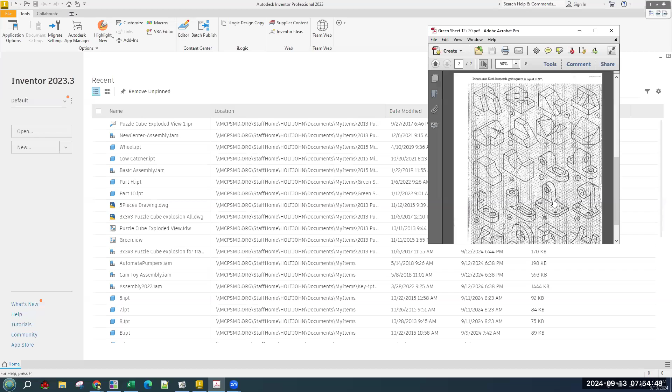It shouldn't be too bad. These don't go in order of difficulty. The hardest one, actually by a margin, is number 7, which doesn't necessarily make sense, but it is. But overall, there are more difficult ones at the end. It's just not the case for all of them.

Okay, so obviously we'll start with number 1. Let's do a new part file, hiding behind my whatever it's called. And let's see what we've got for number 1. Let's make it a little bigger in this size window.

So for this one, we are going to do additive. We are only going to be extruding and creating material. Of course, it could go either way. You could do our normal strategy of making a full block that's the maximum size in every dimension, and then cutting away what we don't want.

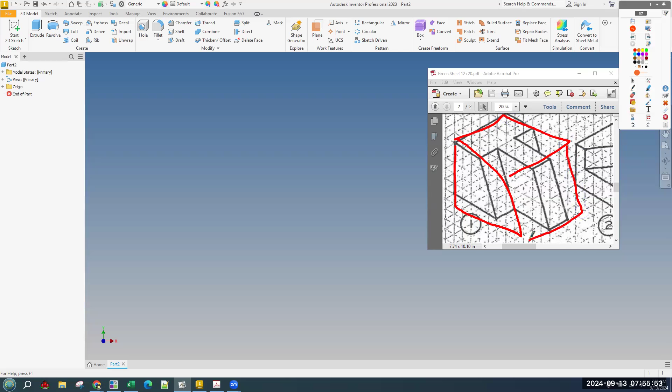But we're going to do this in 3 separate steps. I'll show you the shortcut for doing it in 2 steps, but we'll do it in 3 steps because it will be a little bit easier to understand.

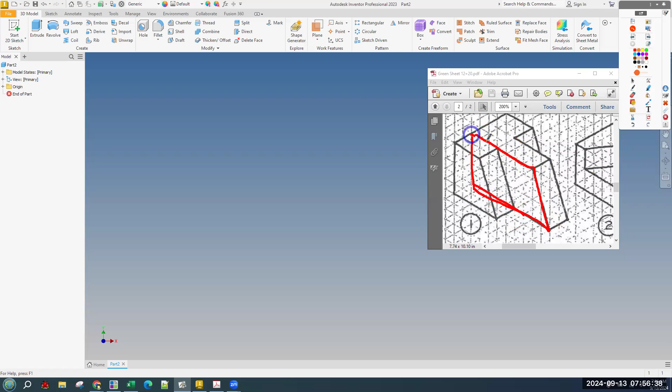The first part we're going to make is sort of this middle part, which is 2 inches wide, and we can presume it's the entire width back there. So we're going to make a sketch that is this shape, which does take a little bit of inferring how long this part is. But we're going to make this shape right here and extrude it too.

And then we will, on the front of that, make this shape, which will be back here, extrude that out too, and do the same thing on the back. I'll show you both of the shortcuts to make it easier, and then I'll do it the thorough step-by-step way. So the ways to make it easier are just a way to do the second part faster.

So we're going to make this sort of middle slice part first. Then this part here, we can extrude it, but we can extrude both directions. But it would need to be asymmetric, because if we're sketching on this face, we're going to need to extrude 2 this way and 4 this way. So we can do a 2-direction extrusion.

The other thing is project geometry, which means if you have another sketch or another face that you want to duplicate, you can project it. I'll show you both of those.

Okay, so the first part, we need a shape that's going to be roughly like this. And these dimensions, okay, across the top, it's 3 and 4. So this is 7 when we get to it.

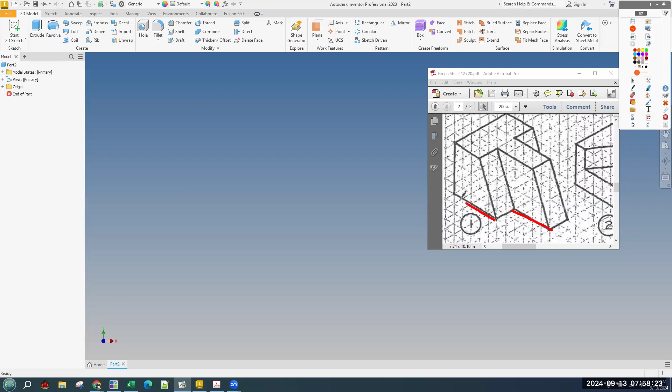And we don't need to know the length of the slope line because it doesn't matter so long as you know where the line begins and ends, so we won't need a dimension for this one. The left side here is 1, 2, 3, 4, 5 this way. And across the bottom is 1, 2, 3, 4, 5, 6, 7, 8, 9 — 9 total this way. So 9 and 7 are the bottom and top, and then 5 up the side, and then connect the slope.

So new sketch on our new part on the XY plane since we're drawing the front. And it's going to be another line tool situation where the line tool is: make the line, dimension, make another line, dimension, make another line, dimension.

So we're going to do the first click just at the origin, just to have something to anchor to, and we'll make the first line. You can do right click, okay, or right click escape, or hit the escape key. But you can also just click on dimension and it will switch it to the dimension tool, even without getting rid of it. And the bottom we said is 9.

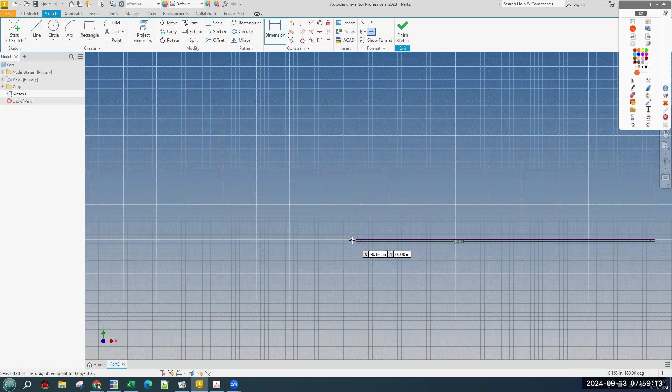And then we have a line tool. Let's snap it to vertical — make sure you can see how when you get close, it does like a little click. Okay, we do want to snap. That will lock it in vertically. And then let's dimension this height to 5.

Okay, then we have another line that goes straight across the top. Snap here to here, and we'll dimension that. That was 7.

Let me move this out of the way so you can see. And then the last part is this line that connects. Even without dimensioning this line, it will be fully constrained because the points that connect are constrained.

Okay, so let's do a finished sketch and extrude. This is the middle part, so we only need to extrude 2.

Okay, so we have this one. We need to draw this shape on this face. Really, we only need to draw the slope line because when we sketch on here, we'll get these lines for free with our auto project edges for sketch creation and edit, the setting that I changed. So we get those for free. We just need to draw the slope line and extrude this forward 2.

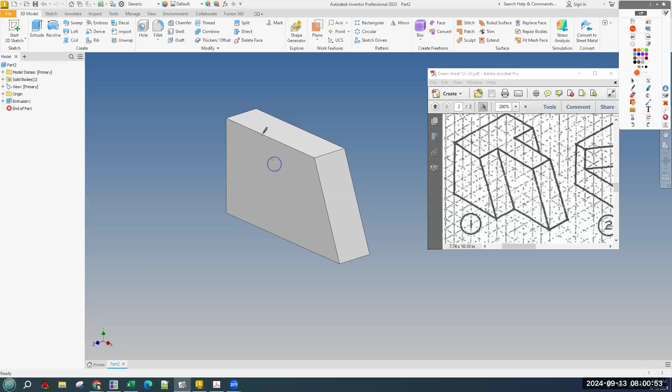So this line, the only line we're worried about is right here. This line needs to be 3 from the left at the top and 5 from the left at the bottom, making sure that when you make the line, you don't snap it to one of the green snaps, but you do snap it to the edge.

So we'll get a line tool, and anywhere on the top edge that isn't a corner or the exact middle point is fine. But again, it has to be on the top edge. If you miss, it won't work. First click, and then same rules for the bottom.

It doesn't have to be exactly here, this is roughly where it's going to be, but anywhere that snaps to the bottom edge that isn't a hard snap is fine, as long as it's not snapped to vertical.

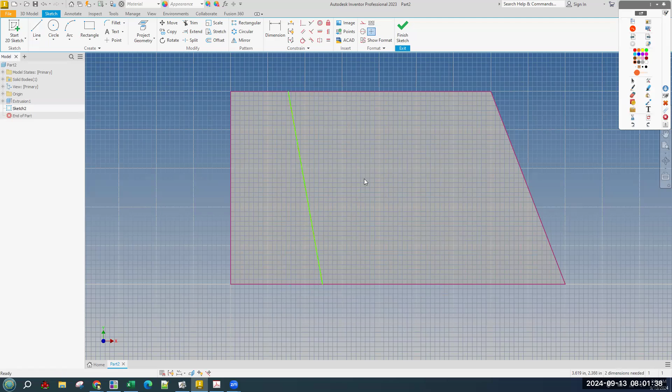And let's dimension. We need to dimension the distance from the end point of this line to the corner, and that works. That's 3. But when you're dimensioning this end point, you can also click on this side. Sometimes you don't get the place to click that you want, so you can just click on the side and it's the same thing.

Okay, and this needs to be 3 from the side. And this other one, first click, second click, and 5 from the side.

Okay, we will finish sketch and... okay, the regular way would be extrude, choose this, and extrude it 2, because that's how far it comes out.

Okay, the first shortcut is doing both extrusions at the same time, which we need not symmetric, we need asymmetric, and we want 2 inches coming to the front, and in order to make it go as far as we need, 4 to the back, because you can see where we're sketching, if we made it 2 in either direction, or symmetrical, the other one wouldn't go through our first part.

So this is the first shortcut. Okay, if you do that, you're done. It's that easy. Okay, the second shortcut, which I don't know why I'm continuing, but it's fine. The second shortcut, what's up?

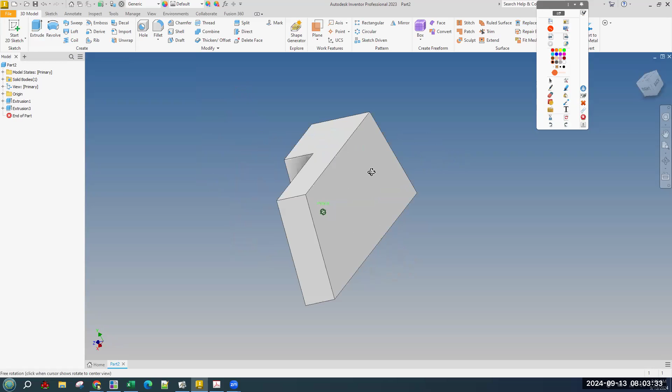Okay, the other shortcut is we'll just do the regular extrusion 2. And when we go to the other side, we are making exactly the same line. This line on this side in the back is going to be something like, it's going to be like that. And we could do it the long way of making a sketch and dimensioning it.

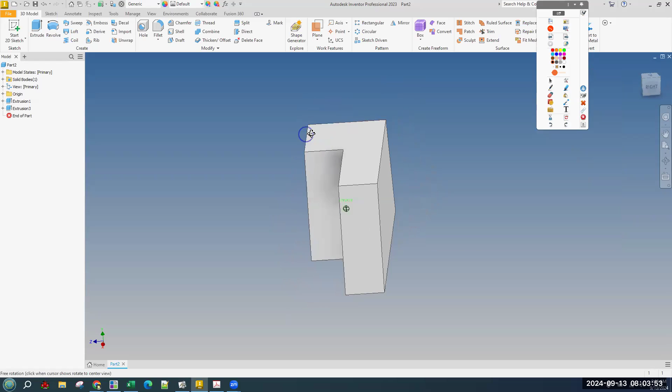But because it's actually the same shape as this, we can use what's called project geometry. So we're going to start a sketch over here like we were drawing it. And this tool up here, project geometry.

Okay, look, I have no lines on this. If I go to the other side, click project geometry and project this face, when I go back, it will be there, right? It just pops over whatever's there. This is a relatively basic use for it, but when we get to more complex things, it's essentially necessary.

But if you did that, you could then finish sketch and do the extrusion, and extrude it 2. Okay, it made the sketch for us.

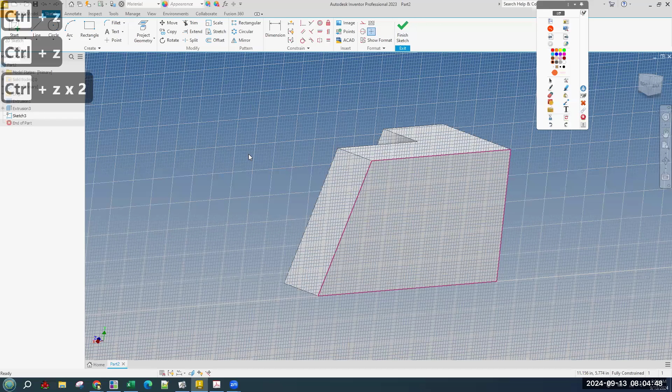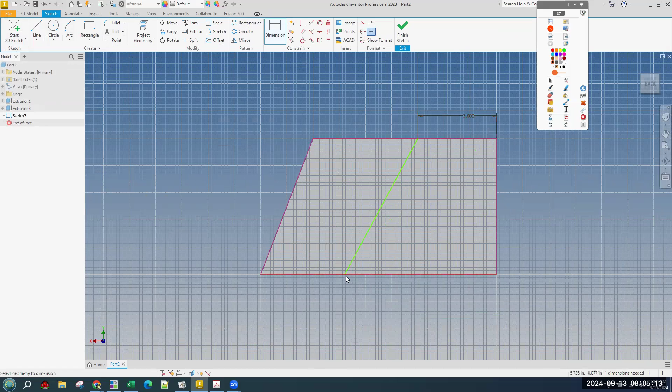The slow way, the thorough way, once you have your first extrusion, is just to do the exact same thing. Put a sketch on the back, get a line tool, these things stay up too long, I don't know how to change that. Get the line tool, same thing, snaps to the top edge, snaps somewhere to the bottom edge, dimension, distance from this endpoint to here is 3, and the distance from this point to the corner is 5.

Same thing as before: finish sketch, then press E for extrude. You can just type E on your keyboard, you don't have to do shift or anything. And there you go, that is part 1 from the back. Go ahead and save it with consistent naming practices: part space 1, or part 1 with no space.

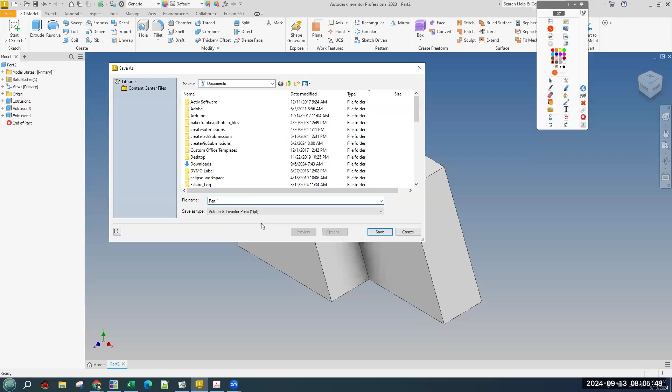Just do the same thing so they line up alphabetically. Okay, let's do number 2. We're going to do additive also, making this base part that is two tall. 1, 2, 3, 4, 5, 6... I think 8 wide is my guess, but the photocopy is so blurred out. Let's see here: 2, 3, 4, 5, 6, 7... yeah, 8 wide.

So we're going to make this bottom part that's two tall and 8 wide: a rectangle, two tall, 8 wide, then extrude it 8, and that'll make the base. Let's go ahead and do a new default part file. Start a sketch, sketch on the front, get a rectangle, snap to the origin, first click, out here somewhere, second click, dimension the height to 2 and the width to 8.

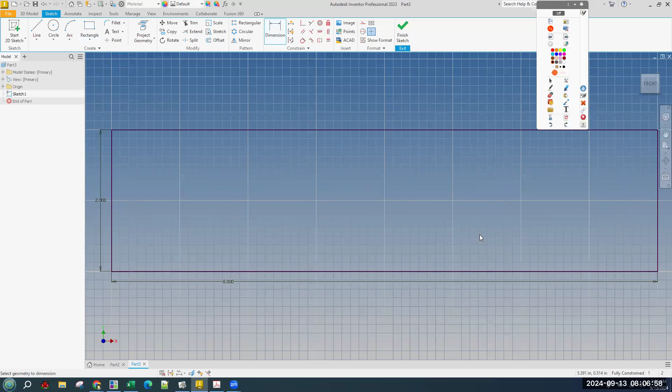Home to zoom out, or really just finish sketch should... well, no, it doesn't. Finish sketch will be like that. And extrude, and we want to extrude it 8.

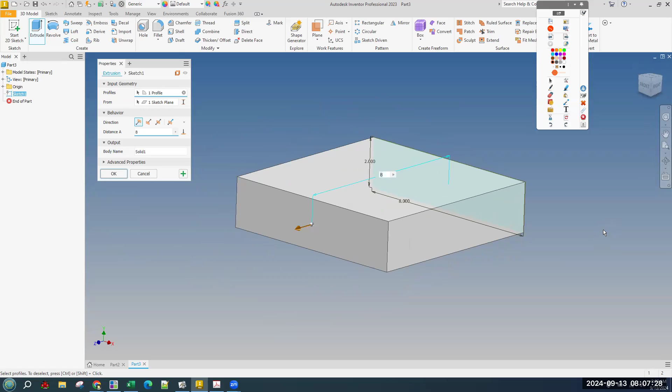It is important, especially when you're doing cuts or second extrusions, the first extrusion is always going to be roughly like this, but it's important to look at your work from a 3D angle. It doesn't necessarily have to be an exact corner, but you should be able to see which direction it's extruding, especially if you're doing some sort of cut. And when you're doing sketches, which are 2-dimensional things, you should be looking at it straight on from a face, because you're working in 2 dimensions when you're doing lines and rectangles.

Okay, so we have our sort of base situation that is like that. And now we just need to do these two top things, which look like that.

Please put the food away, if that's what that is.

And we can do it in the same part feature. We'll make this triangle over here and this trapezoid over here, and in the same move extrude them both up a distance of 2. So what are the dimensions of these shapes? Well, this one in the bottom right is pretty easy.

This length, or rather, all we have to draw is a single sloped line, which will be this one. We will get these two lines for free when we make the sketch. We just need to know where this point is and where this point is. Okay, this point and this point.

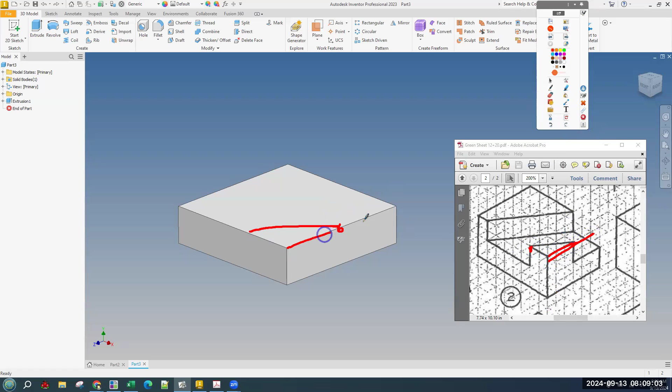We know that it is 1, 2, 3 this way, but since the entire thing is 6, when we click to start the line, we can actually use that center point, or not the center point of the edge, that green dot, as our first click, and we won't need to dimension it. The center dots and the corners are very useful if you mean to use them. If you don't mean to use them, it will keep you from changing the sizes of things, which is not good.

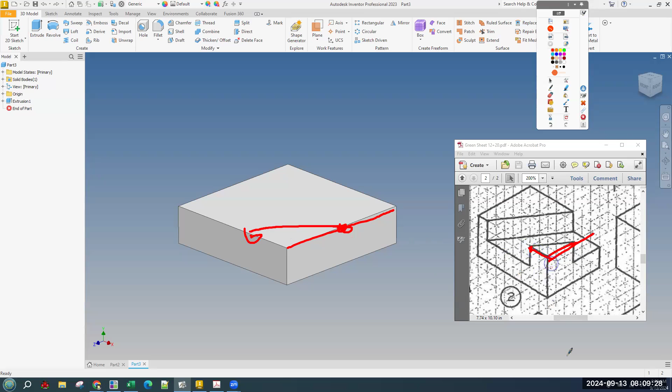And this other side is just 2 from this corner, and that'll be our first triangle. Let's take care of that. We're not going to click finish sketch when we're done with it because the other part is going to go in our sketch. Hold on, did I extrude this right?

I don't think I extruded this right. Hold on, did I extrude it 8? It looks square, let's see here. Edit feature... yeah, I did extrude it 8: 6 front to back and 8 left to right. So it should be a rectangle like that way.

Okay, so we'll start a sketch on the top. We should be looking at the face called top, where you can read the word top. And when you can read the word top, the rectangle shape should be wider than it is tall.

That's how you know you're sketching on the correct side. We'll get the line tool, and we can use the center snap. If you get close to the center, it will click and turn green, and the little cursor middle part will turn green — that's our first click. Our second click is down here on the bottom edge somewhere, but in this case, not the center point, just anywhere on this bottom edge. Click, and let's get the dimension tool and dimension the distance from this endpoint to the corner.

And that distance was 2.

Can you please put the food away? Like indefinitely. Thank you.

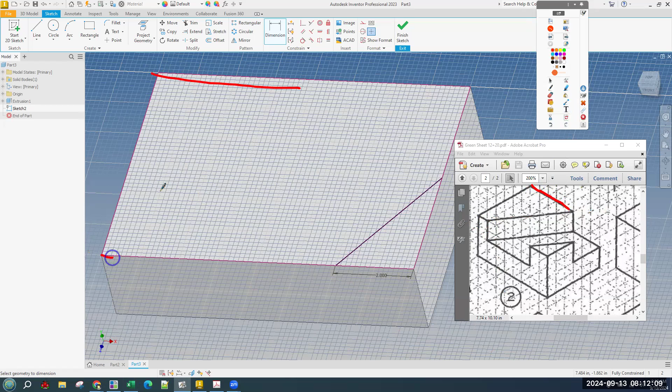So without having clicked finish sketch — if you did click finish sketch, you can always edit a sketch by right-clicking on it, and you can tell I right-click when it's the orange circle. Right-clicking and doing edit sketch will let you bring it back up.

And so our line snaps somewhere on the bottom edge — well, this is really the front of the shape, but somewhere on the edge here, not the corner. First click, and second click somewhere on this edge, which is the back, but not the center point.

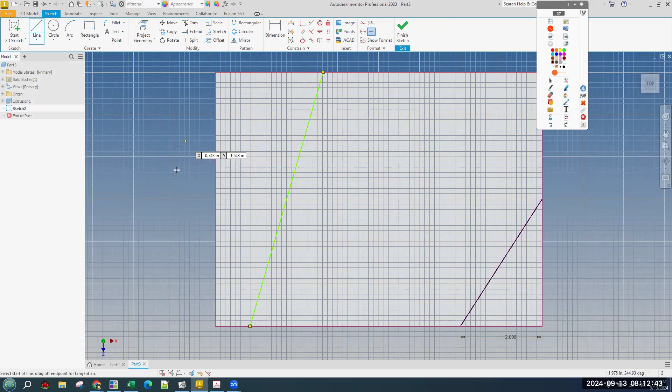And we need to dimension it. The distance from the corner here to this endpoint was 1 and is 1. And the other, from here to the corner, was and is 5.

Now we can finish sketch and extrude, choosing both of the areas that we want. And if you choose the wrong thing, or too much, or something like that, just hit cancel and go again.

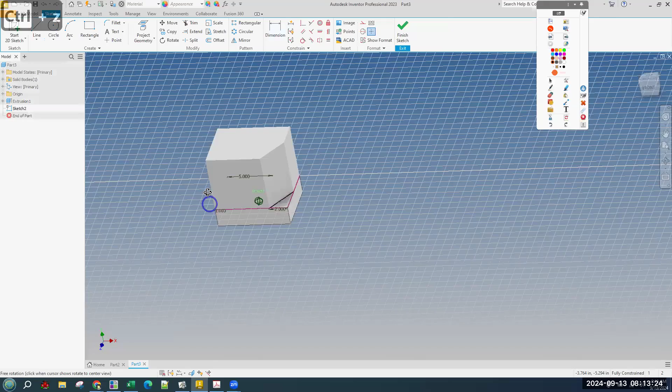Can I hit cancel? Please tell me this isn't jammed. This is bad. Let's finish sketch. Is it all broken? Because this doesn't exist.

Okay. There we go. All right. Yeah, that's not good. But we'll be able to be all right.

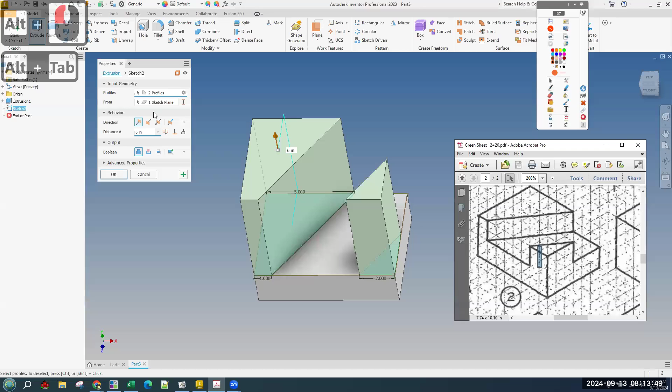So let's extrude, choose this, and we are only extruding it up 2 more than what we have. So we're just going in the regular direction 2. And there you go — that is part 2.

Okay, let's keep moving.

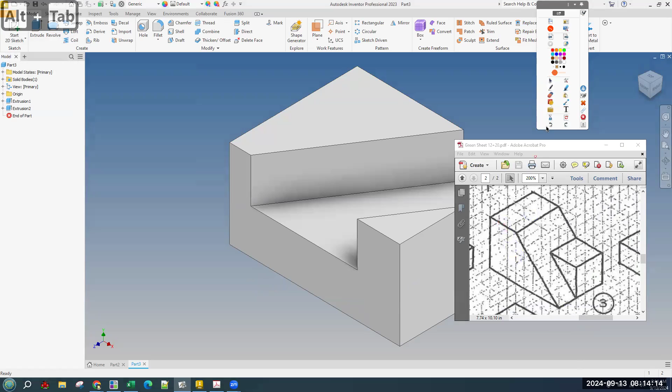Part 3, there are a few ways to do this. Like everything, there's a few ways to do this, but we are going to do this in 2 steps. First, let's make a new part file.

Our first step is going to be to make this wedge shape and extrude it all the way back. So we'll have this, and it'll go down like that. And then we're going to make this part over here, which is actually going to be easier to draw on the back and then extrude it forward.

But regardless, same thing as before, where we have a sloped face, which means as long as we know this point and this point, we're good. So from here, it is 1, 2, 3, 4, 5 tall, and 1, 2, 3, 4, 5, 6, 7, 8. So 5, 8, and 3, and extruded 5 also.

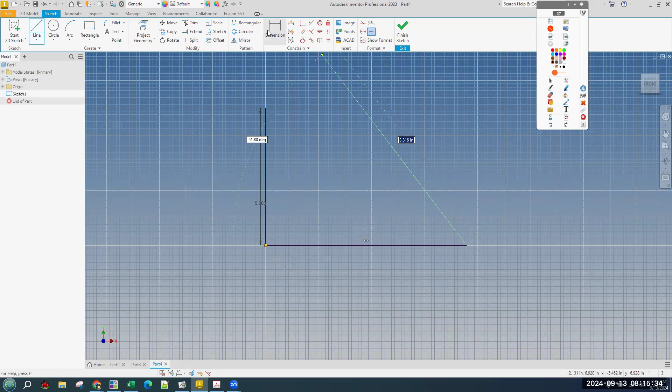So start a sketch on the front and use the line tool. First snap here, second snap there. Remember, lines are always line-dimension, line-dimension, line-dimension — 5 tall. Line tool: from the bottom, snap there, across, dimension that to 8.

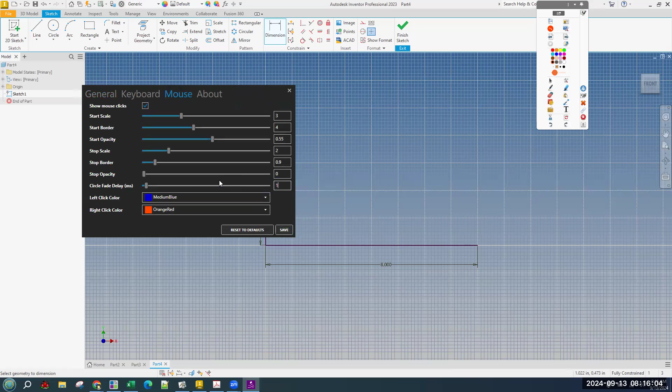I need to speed up some things. Hold on, let's go like this. How can I do that? Let's go mouse, and let's make that set of 0.3. Let's go 200. Maybe 150. Yeah, that's a lot better.

Okay, next line across the top.

Dimension — maybe that's a little too short, getting a little pedantic here. But either way, 3 across the top, and a line that goes from here to there, and it's already fully constrained. Right click OK, it'll say fully constrained, plus all the lines are black or dark blue or something.

We need to finish and extrude, and our extrusion distance was 5. And there is the first part feature, or the main part feature. The other part feature is a sort of block.

That is what we already have plus 3 by 3, up 3 and over 3, and it comes forward 3. So the sketch we're going to make is just this shape, but we're going to make it on the back.

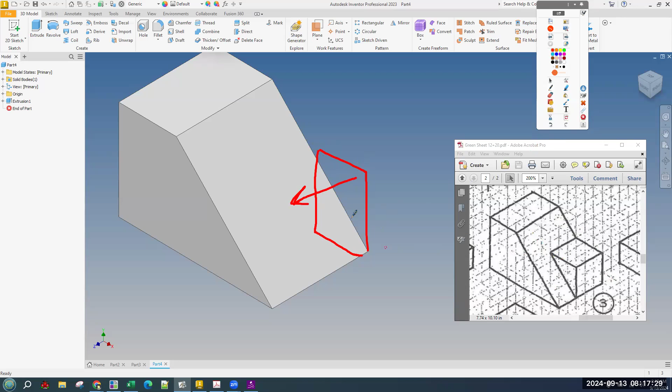Because we want it to be a closed loop and everything, it's actually easier to make a full square that's 3 by 3 and then extrude it forward. The fact that some of it's going to extrude through twice doesn't change anything.

So we are going to look at the back. This face right here, you can see, is the back face. Let's go ahead and start a sketch on this.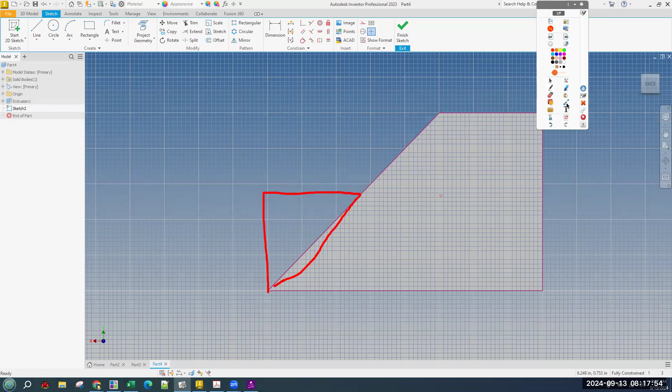Like I said, the shape we want to make is just 3 by 3 this way and extrude it. But you can do it in one step with a rectangle and snap it. It has to snap to this bottom point of the wedge, and then you can just make it up here.

If you snap it to here, it kind of limits it, especially if you click on the middle point of this side, which should be somewhere around here. Am I not getting it? Yeah, there it is. So just something like that is fine.

And dimension it to what we want, which is 3 this way and 3 this way. It just as easily could have been done with lines — in fact, I'll show you that also. Either way, so long as you... well, the line tool is pretty obvious. It would have been line, dimension, line, dimension, so long as the dimensions are right.

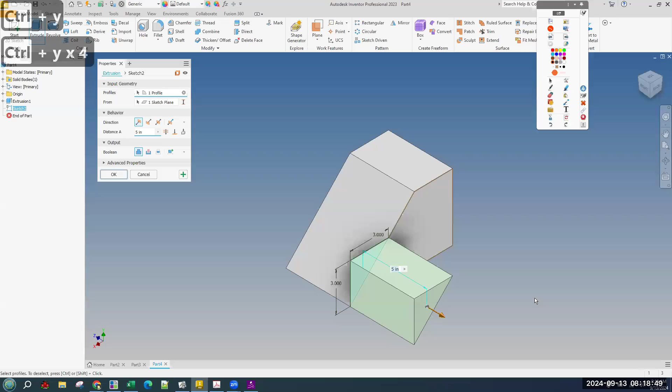And finish sketch, extrude, and it will actually let us just choose this one. But if it didn't — which sometimes it guesses wrong — if we chose both of these, regardless, we would need to switch direction, making sure it doesn't switch to cut. We need to leave it there. In fact, that alone is a reason to only select part so that you don't accidentally cut.

By which I mean, when you go to extrude, you really might as well only choose that one. And we'll switch direction and make it 3. And that's it. Now hit OK and save it.

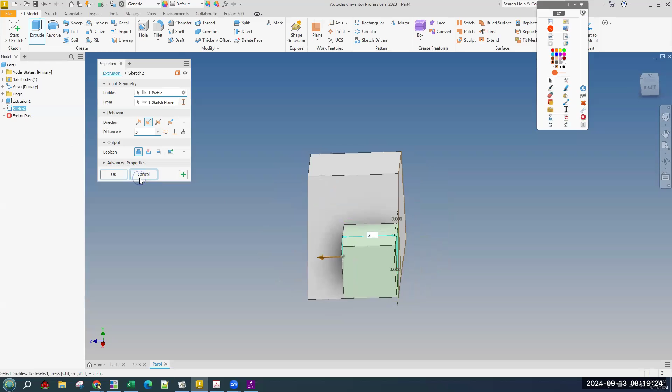If you did this, this is an important thing to note — this will save you some trouble. If you do switch direction, sometimes, and it did for me, it will automatically switch to cut, because it thinks you're extruding into something you probably want to remove or get rid of. If you switch direction, you can see it switched to cut, and that isn't what I want. If I accidentally hit OK and it wasn't this, the way that you solve it is by editing the feature.

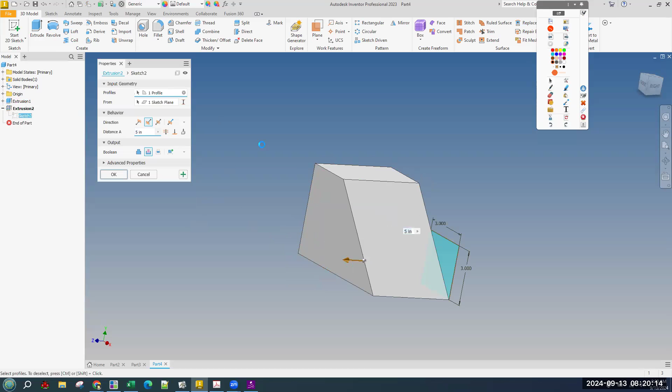The sketches, the two-dimensional things, are consumed by the feature. If you want to change the extrusion distance or what have you, all you have to do is right-click on the name of the feature. In this case it's extrusion 2, and do edit feature, and it will give you the chance to change things — which I don't want to cut, I want to create material, but I only want to create 3.

And there you go. That is part 4.

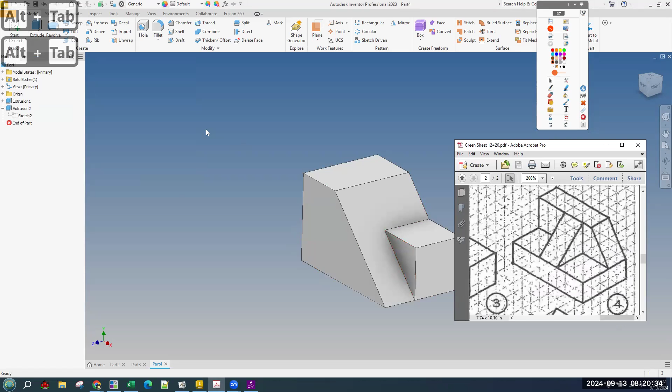Okay, and I think we can do 5 today. That way we'll get through the packet in 4 days instead of 5 days, which still sounds like a lot. Maybe we'll do 6 today. I don't know, let's see.

What's up? You need to switch direction. Okay, so for you it is going the other direction, like out. If you switch direction, first of all, you're extruding — look at it from a corner up here. Okay, yeah, you got it. You're next.

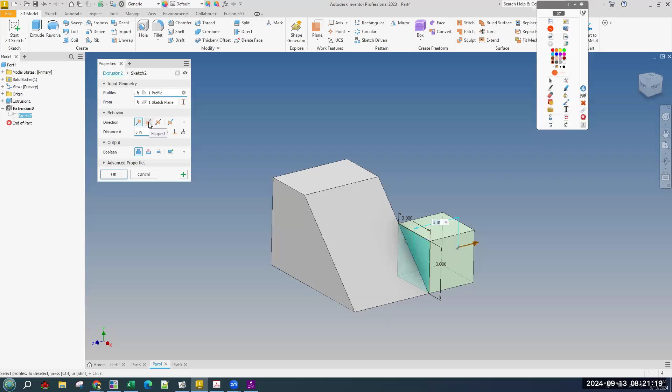Please be on. Good. If you choose the other direction, it will move towards the inside, but make sure it doesn't switch to cut, which, I mean, just be aware. So, yeah, there you go. And it's fine. Hit okay.

What do you got? It's probably not a closed loop. You probably missed a connection, is my guess. Or do you have 2 sketches open? Okay, then it's somewhere on the sketch, it's not connected all the way around.

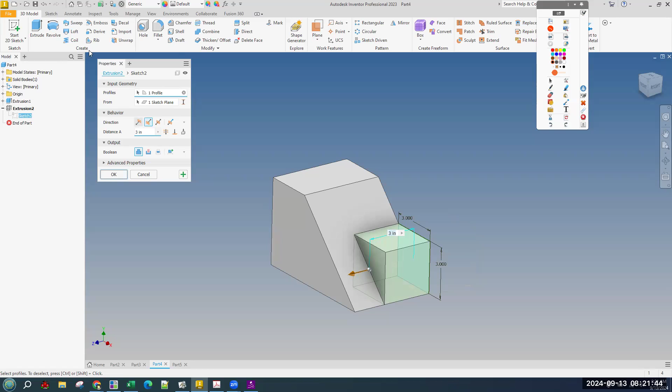Okay, so part 3 and part 4 look like this. We are actually going to do this in a few different part features, trying to make it as easy as possible. But this is going to be a subtractive one, where we start with our full block of marble and cut away everything that isn't our sculpture, which is a subtractive process.

So what is the size of our block of marble? 3, 2, and 3 is 8 wide. Height is 2 and 3. Tall is 5. And so rectangle 8 by 5, extruded 5.

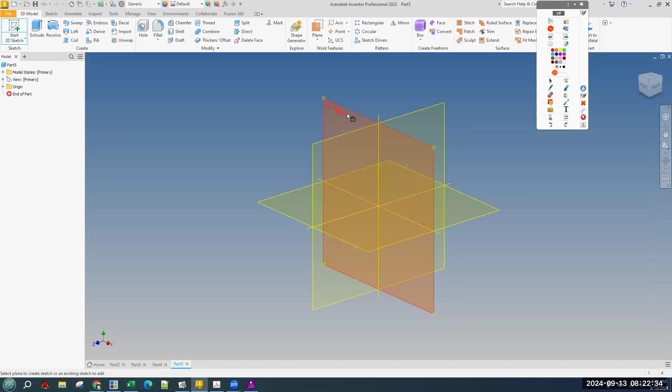So we'll start and we'll draw on the front. We'll get a rectangle. And did I get a rectangle? I did, and we'll start here. And what did I say? 5 tall and 8 wide. And finish sketch, home to zoom out, and extrude it 5.

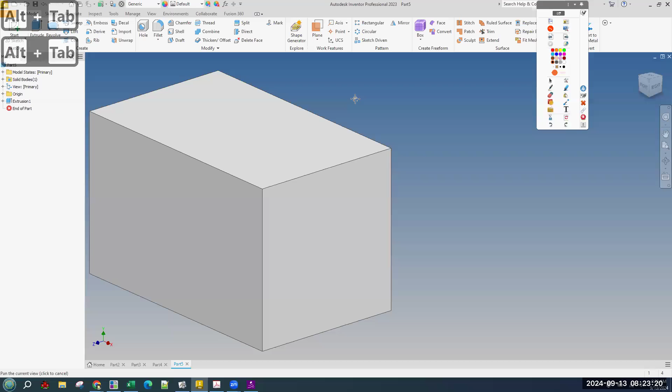Okay, and so now let's figure out what we need to cut. The way I see it is that there are these 2 sort of steps or platforms or things that are each 3 by 3 squares. We're going to do those first. And what we have is this big...

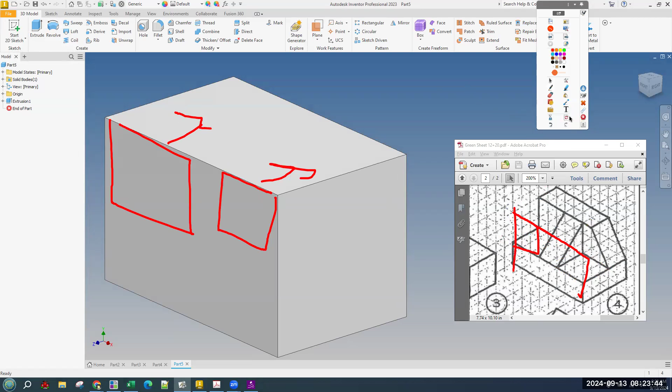We could either draw squares on the front that are 3 by 3 and cut extrude them 3, like 2 squares like that, and cut them back. Or we could do the same thing on the top, a couple of 3 by 3 squares here and cut extrude them down, which is the way we're going to do it to make these platforms. We're going to push those down or cut material. Like I said, they're just 3 by 3 squares, easy to remember, and cut extrude 3, so they're 3 by 3 cubes of space, which you can ignore that if you didn't get it.

Okay, so we need a new sketch on the top surface. I like to look at it from an angle where you can read the word, usually I should say. We need one rectangle that snaps to the bottom left corner, which is really the front top left corner. And another one, I'm just going to go ahead and draw a rough estimate for both of my rectangles first. You can see where we are sketching, we're sketching on the top.

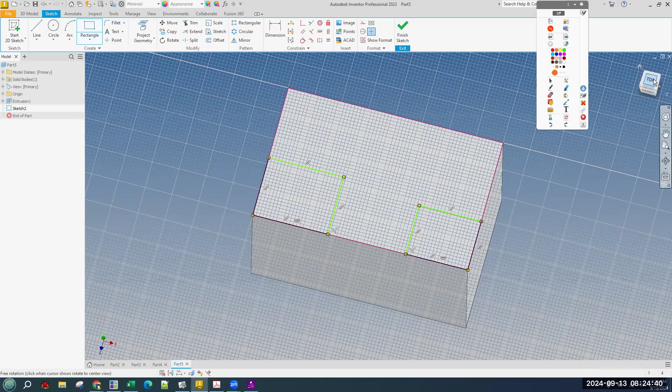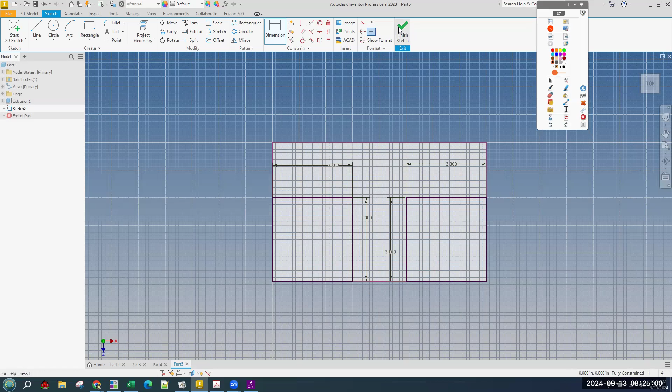And let's dimension, all four of these green lines are 3 - 3 wide, 3 tall. And again, 3 wide and 3 tall. Finish sketch and extrude. Extrude this, switch it to cut, but we only want to cut 3.

All right, and the way I see it, we definitely have at least 2 more features, but we're going to try something different. If you were working on this on your own, the way I usually show it is essentially the same tools we've been using before, where we're going to sketch in order to make this sloped face. We would sketch on this face, and in that sketch, just have a line that connects these 2 points and cut away everything that we don't want. And actually, that would be plenty fast, but I want to show you a different tool.

And the tool is called chamfer. There are 2 ways to sort of round over an edge. There's chamfer, which is like a cut or a knockdown type of thing, a sort of - they call it breaking the edge. And the other one is a fillet. You probably will say fillet, but it's not - it is a fillet, and that is a round over edge situation.

All of which you need to dimension them, you can't just take the hard pass. You can't just throw it up there, but we're going to use this opportunity to use the chamfer tool. And the first thing you have to select - any tool that pops up, well, that doesn't work. Any tool that pops up, I need to use a tool that will actually work.

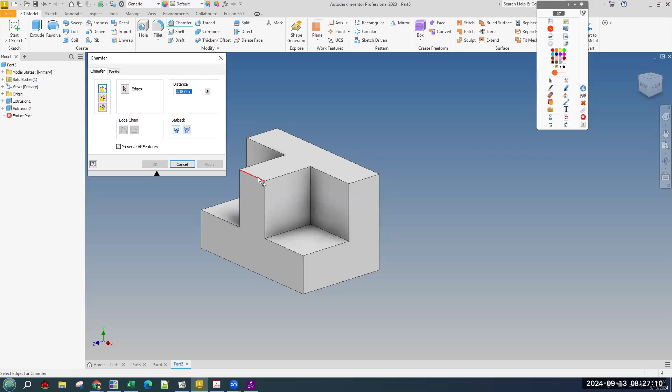The dimension here is the distance from that edge. So the distance that I just dragged it to is 2.1875, which is actually 2 3/16, is the distance from the edge that we selected.

Because it is this first type, it will make it the same distance in both directions, whatever dimension we put in, which means this will be 45 if we started with 90.

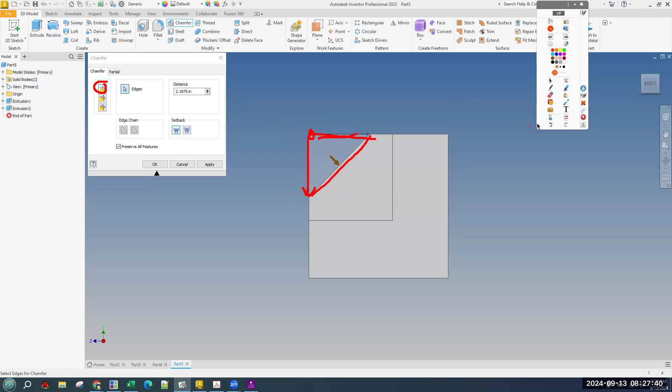If you mouse over, you can see this first type is probably called symmetrical or identical or something like that.

So the dimension here will be distance. That's the distance in. You can also choose by distance and angle, and you can choose by 2 different distances, which is what we're going to do for the other slope face.

But for this one, we're just going to start from scratch if you're trying to follow along. Chamfer tool, choose the edge that we want to cut or knock down.

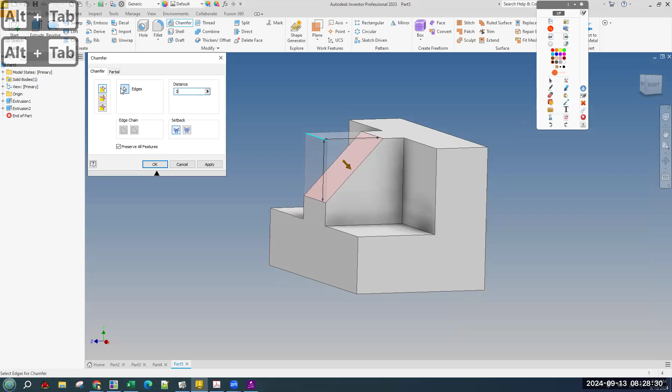The dimension is how far from the side, which if we have our rectangle here, it's 3 in from the corner that we have. So the distance is 3. And hit OK - that is one way to do that.

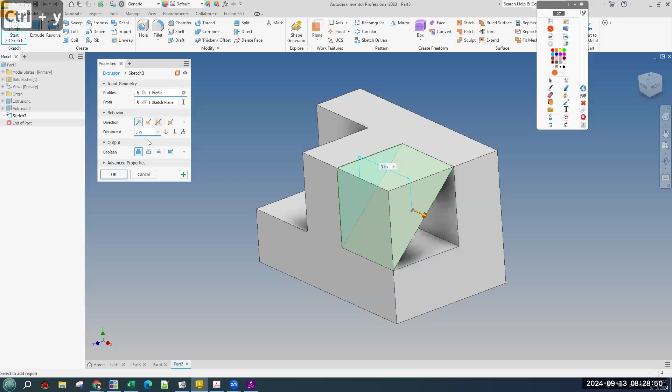Again, we could have just put a sketch here, get a line that connects here to here, finish sketch and extrude. That would have been faster and used abilities you already have. But showing you the chamfer tool, I think, is at least extending your abilities.

And we're actually going to use the chamfer tool for this other sloped face by using the 2 different distance option.

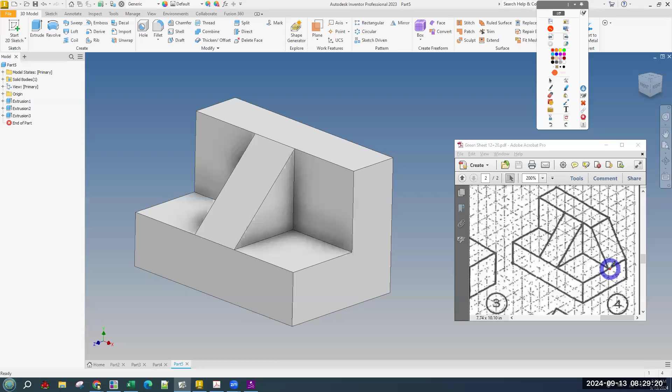Because right now, this block goes out here, which means it's like that. And this slope face starts here just like the other one, but it doesn't go to the corners.

It's not 3 in both directions - it's only 2 this way while being the full 3 that way. So we have to use the 2 distance type of chamfer.

So we'll use chamfer - first choose the edge, then switch to 2 distances as the type of chamfer. And we need to - do we need to reselect? Yeah, I guess you reselect the edge.

Distance 1 should be 3 and distance 2 should be 2. Depending on which way you're counting as positive, it might be 2 this way and 3 this way.

Or at least in the space, you may have distance 1 and distance 2 reversed, but either way it shouldn't look like this - it should look like this.

Okay, so that the slope is like that. And if you need to see that again - why is this... oh, because I made the other thing like that.

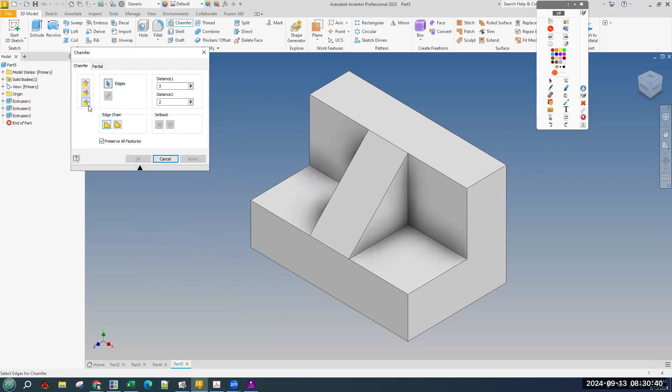So it's chamfer, choose - I guess technically you should choose the 2 distance option first because it made me reselect. Choose the edge and then figure out which is distance 1 and which is distance 2.

The one that goes this direction, which for me is distance 1 and probably will be distance 1 for you, needs to be 3.

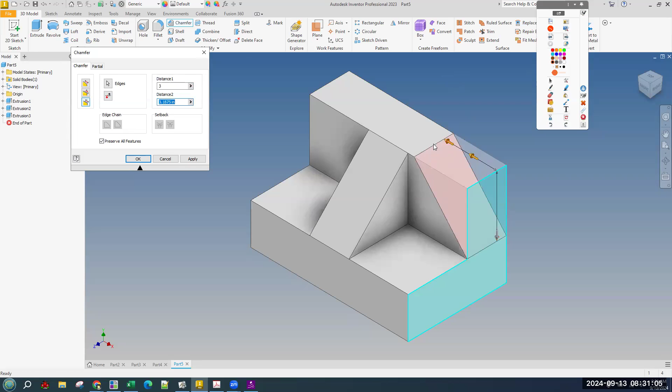And the one that goes this way, for me, is distance 2, and this needs to be a distance of 2 as well. Okay, and there you go - part 4.

Okay, and I do want to get up through all this stuff. Maybe 5 is enough to do today so that we can get the walkthrough up.

Okay, I think part 5, the 5th one of today since we started at 1, is probably the second most difficult on this, at least not knowing how to do it from the start.

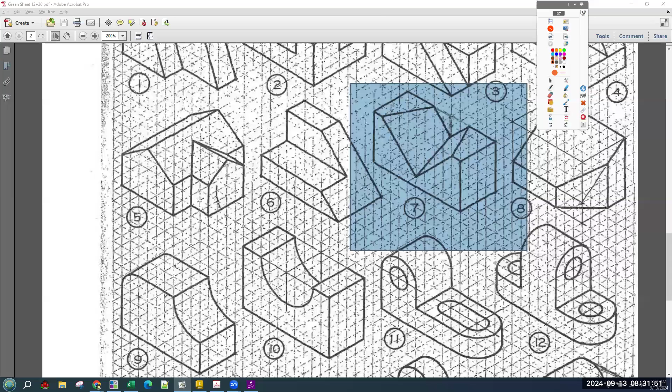The steps themselves, once I show you, aren't that hard. Part 7 is still kind of difficult even once I show you. But like I said, we're going to work on part 5.

Part 5 we're going to do in 2 different steps. First, we're going to draw this pentagon and extrude it all the way across.

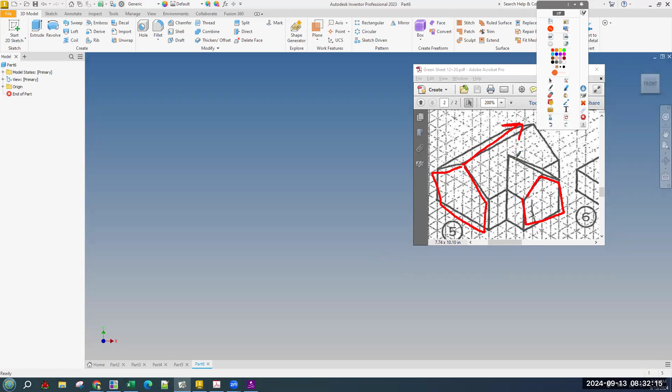And then once we have that, we're going to draw this shape and extrude it out and back in.

Okay, so our first sketch is going to be this, which the easiest way to do is make a rectangle that's 3 by 6, and then find the center point of this and go up a distance of 2, then connect down.

So we're going to start with a rectangle, or start with a sketch on the front face. We'll draw a rectangle here, and this is just sort of the bottom of the house. That is going to be 3 tall and 6 wide.

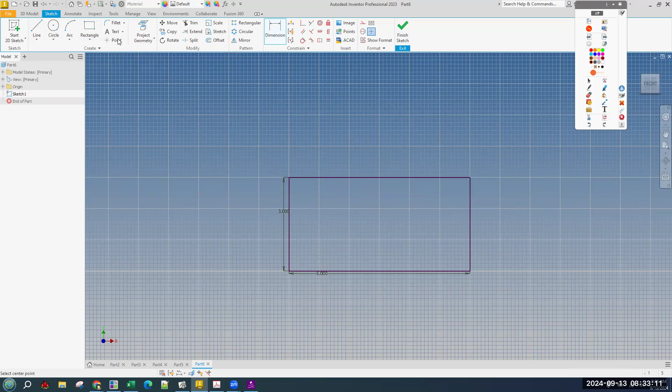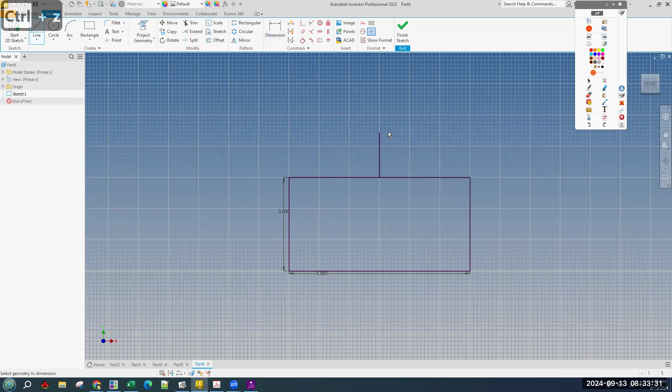To make the vertical thing, we could use a work point, which will let you dimension the location of that. But it's actually just as easy, and probably easier, to use a line tool where we draw a line from our center point, snapping to vertical. The only reason to do this is to get the endpoint as the location of our slope lines. But we do need to dimension this. The length of this line needs to be 2.

That is, okay, what we already have is this rectangle. Try to draw it neatly so you can see it. From this center point, we draw this line up just so that we can draw lines that connect down to close that loop in the right dimensions. So we get the line tool and snap to the end here, snap to there, and the same thing again here to here. Then we can finish sketch.

And extrude everything. Extruded 8. All right, so there is the first portion, the first part feature. And yeah, so this is good.

The other part feature, we are going to draw right here. This feature is interesting in that we can do the same thing with a rectangle, that is actually half distance -- this is 1.5 above. So that's important, and then it just connects the same way.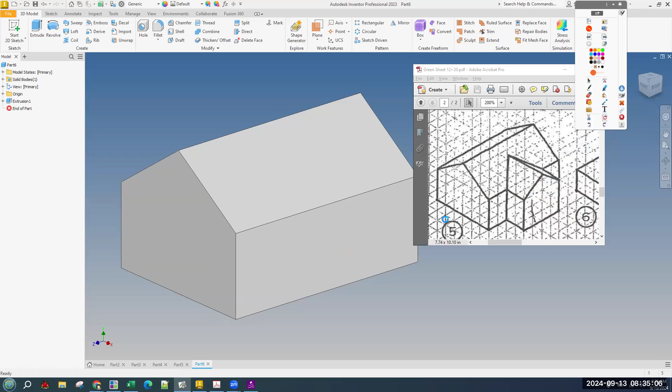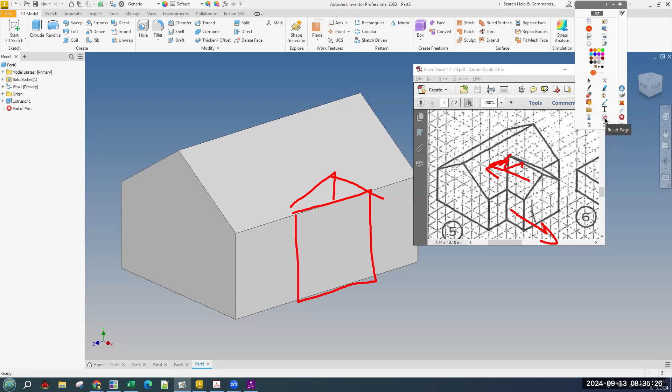So the way we're going to do this is we're going to sketch on this face. We're going to make the rectangle bottom first, which we need to put enough dimensions on, then draw the rest of the shape. Once we have our shape, we're going to extrude it forward in one direction and extrude it the other direction so that it intersects. Ideally -- we'll see what the pop-ups look like.

So let's start a sketch, and we're sketching on this face right here. Look at it straight on. Our shape is a combination of a rectangle and those extra lines. We want our rectangle to be the same height as this side. So our face looks like that at this point, behind this new extrusion, and the rectangle portion is the same height.

So we are fine getting our rectangle and snapping it to the bottom edge somewhere, not a center point or a corner. Same thing up here, snapping it to the edge, but not a center point or corner. You can right click, done.

We are still missing 2 dimensions. Rectangles normally have 2 dimensions, but we've already dimensioned 1 -- we've made it this height of 3 by snapping it. The 2 dimensions we need are the distance, like the width of the rectangle, which should be 4.

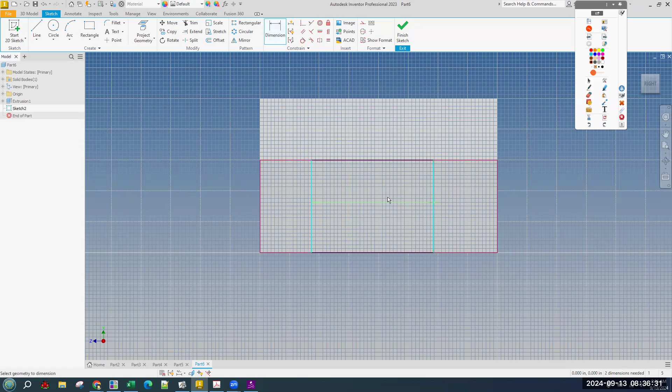That was a 3-click dimension. I'll show it again: dimension tool, first click on one of the lines, second click on the other line, and then click in between or below. And that needs to be 4.

We still need one more dimension, and that dimension is the location of this rectangle. We've drawn a rectangle that's 3 tall because we snapped it, and made it 4 wide because we set the dimension, but it's not located anywhere.

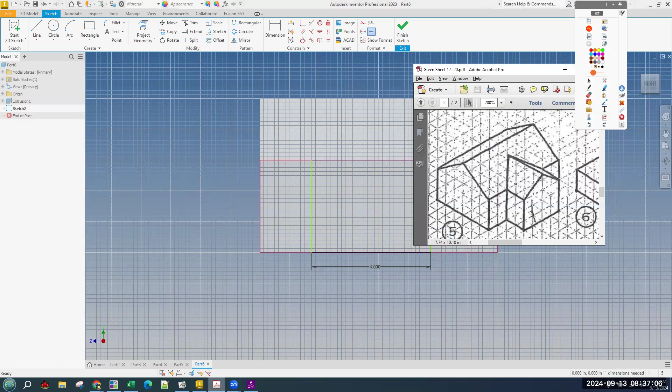So we're going to dimension its distance from this front, which, if we look at it from a corner, you'll see the distance from here to the side is 2. So we need to make sure this is locked in 2 away from what's technically the front of the shape -- if it's a house, it kind of looks like the side.

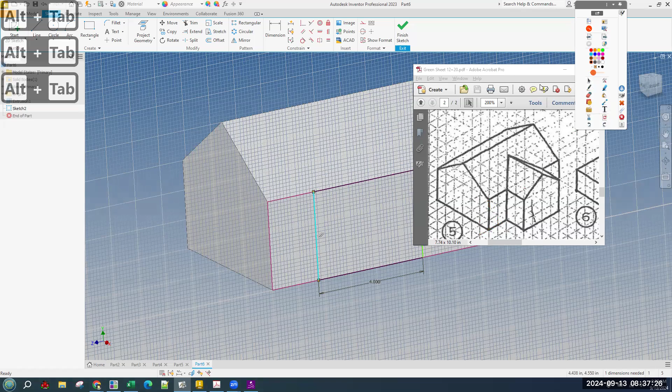But either way, dimension tool -- no, that's not what we want. Dimension tool, distance from here to here, and move it out of the way, which is an easy way to not break it. And then set it to 2. Okay, so that is the start.

That's the rectangle portion of what I guess is the front door of the thing. And then we just need to draw -- we already have the rectangle -- a line from the center point up 1.5, and then connect those. We'll do that next.

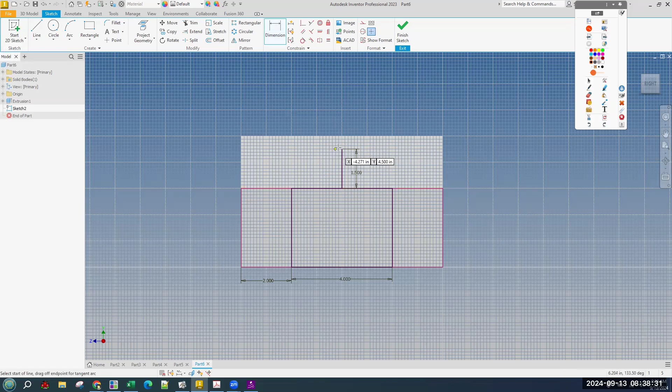Line tool, find the center point, which will be a green dot. First click, and then make sure it snaps to vertical. Nope, I missed. Line tool, snap to the center, snap to vertical, dimension this to 1.5, and then lines that close it off.

Okay, I think we can do this in one move. We finish sketch, and we should be looking at it from a corner, or at least a 3-dimensional view. It doesn't absolutely have to be a corner—you can free orbit if you want.

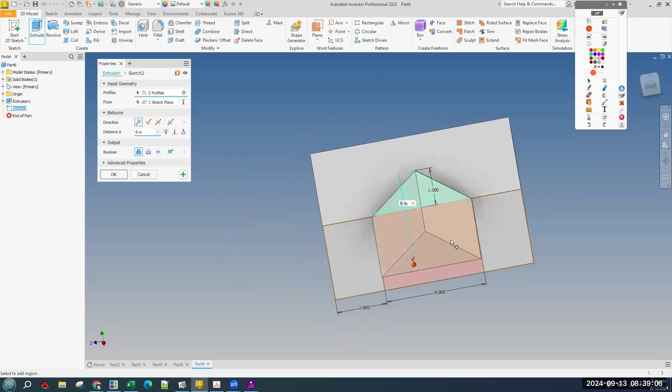Let's go extrude. We definitely want to extrude everything we just drew, without clicking on the things we don't want. But we want it to go in 2 directions, going forward a different amount. So distance A is forward—that only needs to be a distance of 2 to the front.

Actually, we might be doing this the wrong way. Well, either way, let's figure it out. It's 2 to the front, which is how far it pops out. And the other direction needs to go to next—can we get to next?

Hold on a second. Let's do sketch, extrude. Is 'to next' an object or an option? Flipped, and... no. What is to next? What happened to that pop-up?

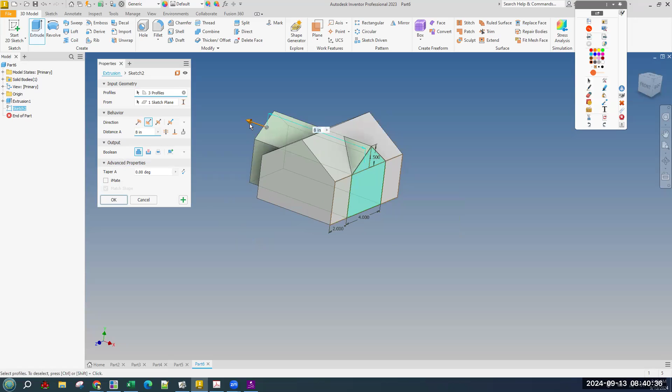Okay, so technically we could, without cutting it, just figure out how far the part that goes in needs to go so that it doesn't stick out the back. We're extruding it in, but we don't want it to stick through because that's not part of it. But there should be a 'to next'—there we go. Maybe that was there already.

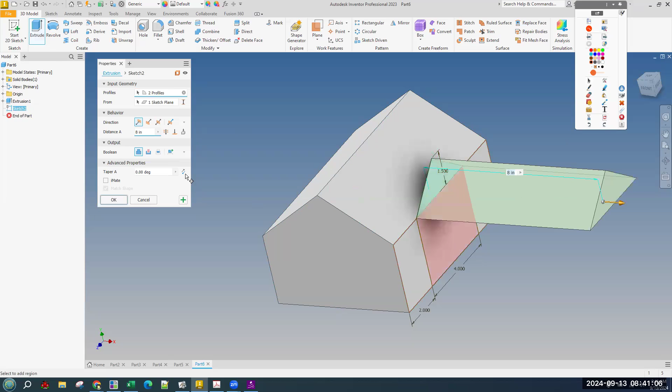Let's see here. Can we do this with our asymmetrical one? Asymmetrical—distance A needs to be 2, and distance B needs to be... no, it doesn't do that. Okay, so change my mind once again. Get to this point where you have the sketch done. If you already did it the other way and it's correct, that's fine.

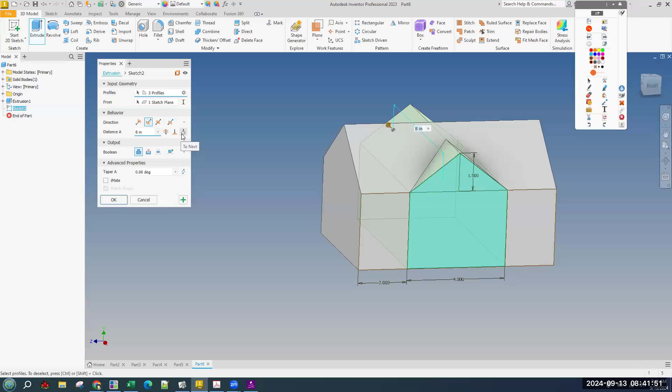But we are actually going to do this in 2 extrusions because I want to show you 'to next'. We have our finished sketch, that's a closed loop. Choose all 3 portions—if you did it the same way as me, it would be the same. We want to switch directions, but not cut, and the thing we want is this 'to next'. You can see it extruded it exactly back.

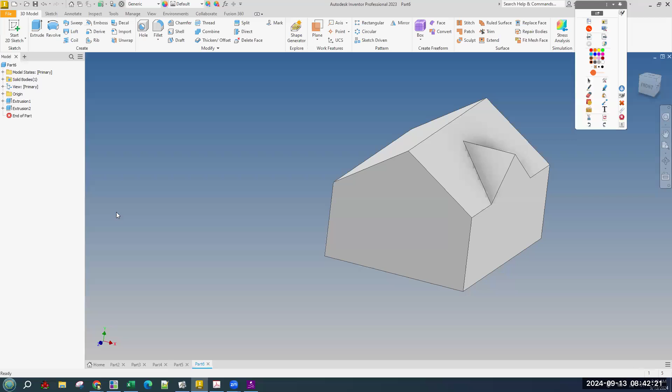Exactly to, or well, you can do 'to' and then choose the face you want it to extrude to, and it will close it off, or 'to next', which just means it extrudes until it touches something that it fills in. And is this not the best way to do it? I don't know—there's a few ways, and I'm not quite sure which is best. Well, at least I've shown you 'to next'. I guess the asymmetrical way is probably the best.

Okay, if you're here, we can go extrude. Once again, choose everything, and we can do asymmetrical. The distance forward needs to be 2, and the distance backwards needs to be whatever distance goes into the part, but not through—so it's not going to be an exact distance. Does 3 work? I guess 3 is fine.

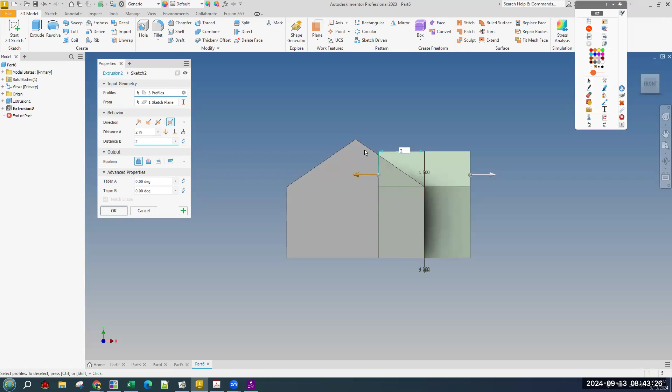Well, that makes sense because it's halfway in. That makes sense completely. So long as it's not sticking out the back of the part, that's what we're looking for—asymmetrical, with 2 towards the front and 3 towards the back. If I do 2 towards the back, you can see it doesn't go all the way, and that would be wrong. 3 is a good one for that, or something over that.

There you go, and there is part 6. I'll check it here momentarily.